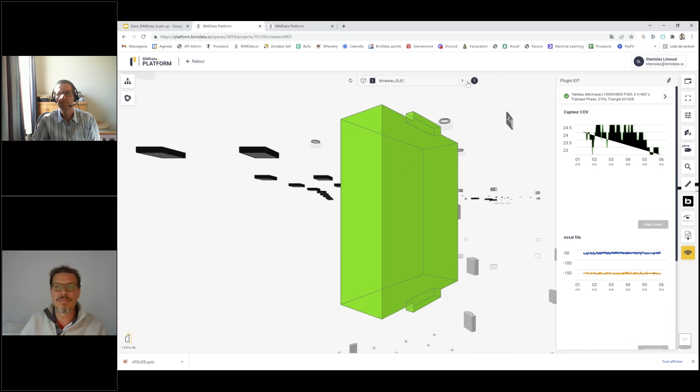So basically, I'm going to open the electrical model from the Socotec head office, and as you can see, we are fetching data from Schneider Electric. Again, there is no way I can interpret the data, Schneider is doing it. To give you a better view, I'm going to add the architectural model, and then you get the idea.

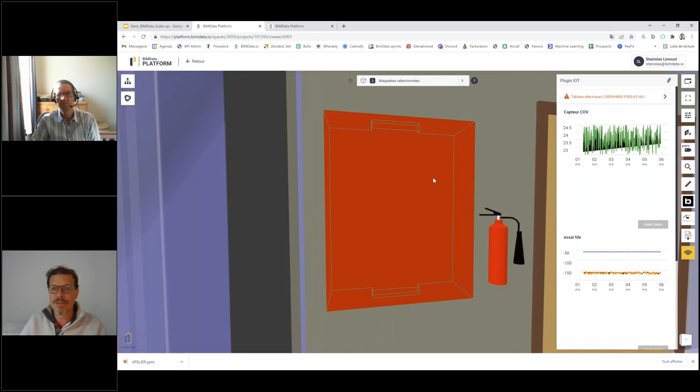For example, if I click on and I'm looking for an alarm, I've got an electrical board which is in red. So I just click on it and I've got the data, and I've got as well the 3D context. That's what you can see on the platform. It's not being used on the BIMData platform, it's being used on the client's own platform, so they can view the alarm and act on it. So basically, that's the idea.

The idea behind the technology again is to be able to do some connection with other data. It's not about one specific answer to a problem, it's more about how do I connect the right solution.

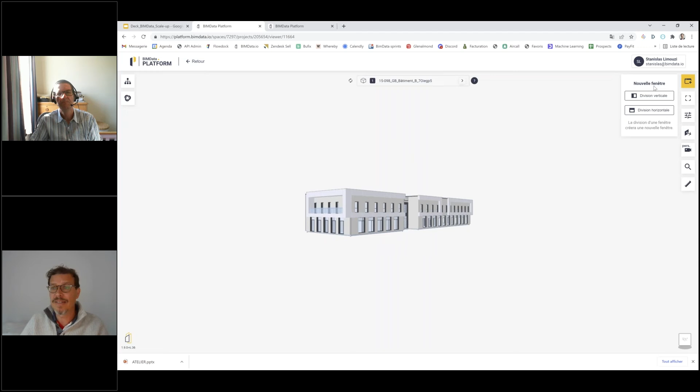And here I've got another example, basically, where the facility manager, again, is using our technology in their system, so they can integrate all the other services into the model.

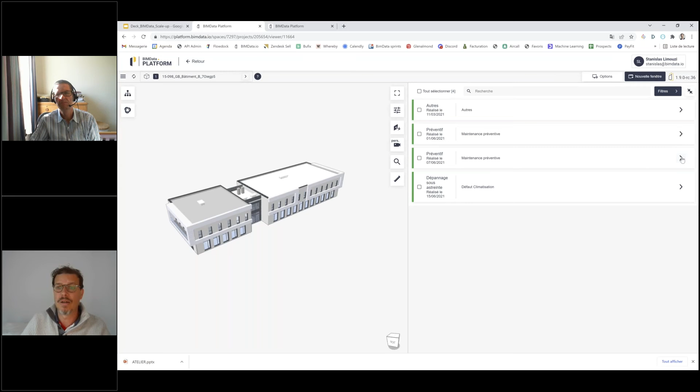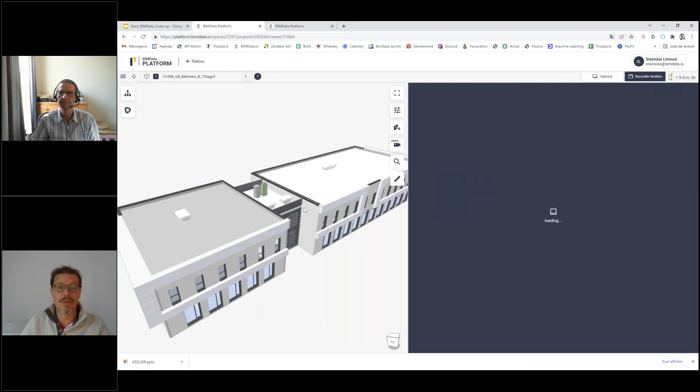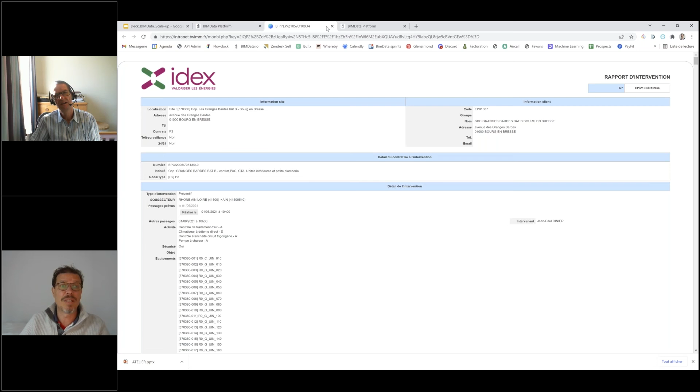So here, for example, I've got a filter where I can look for different periods of time, type of intervention, and such. If I click on one of those, I can do the link between the 3D model and the other services, and you can see the highlight here. I can do it the other way around too—I can click on an object and see what sort of intervention has been done on this specific equipment. And I've got two types. If I want to really see what's happening, I can make the link with the CMMS software, and basically I've got all the details of what they've been doing on the platform. So this is an example of the interface between the BIM structure and other types of data.

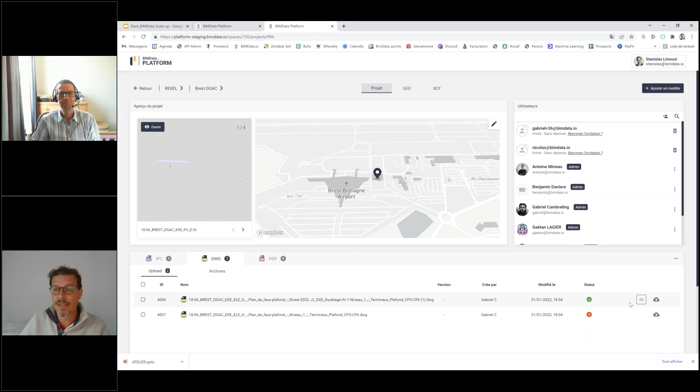We were talking as well about the way we connect different types of data. There's a very good way to work on buildings with all the data they have—of course using BIM, but also documents like DWG or PDF. I've got an example here where we have everything, but what we're trying to do is use the same sort of structure of a BIM model with data that has not been BIMmed, but the data is still worth a lot.

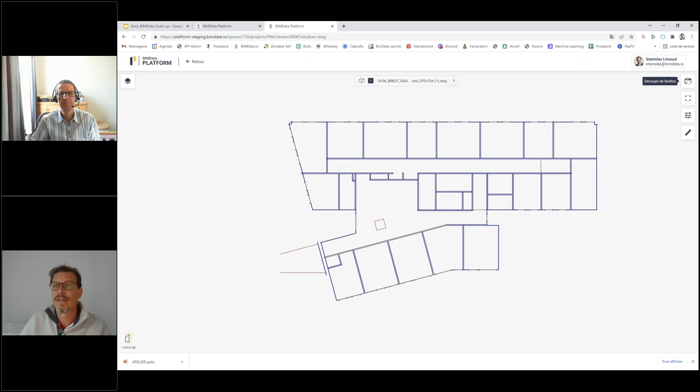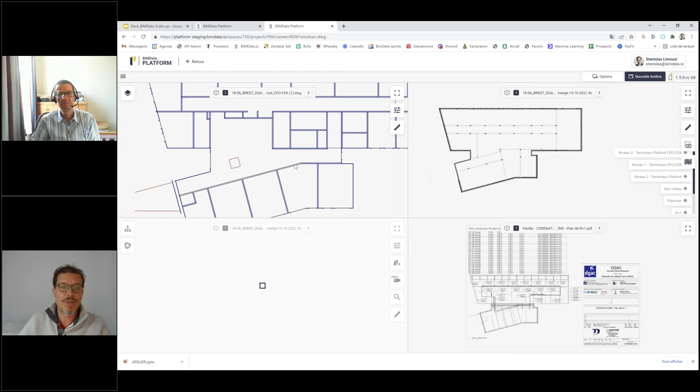So if I take, for example, here—let me check this. I'm going to open the 2D viewer, and then I'm going to open the PDF viewer, and again the 3D viewer here. So what we're doing is making connections between four types of data: the 3D model, the equivalent 2D IFC with the same sort of information, synchronized with the 3D—for example, if I move my building, I'll see this connection—and I'm also using the PDFs and the DWG.

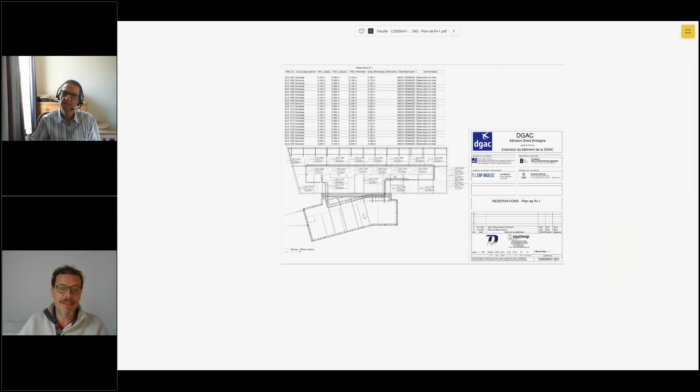Basically, one of the very important parts of BIMData is that we make this connection between different types of data. Every type of data is important, and legacy data has to be used because it's worth something. So we connect data, we connect people, and we connect systems. The legacy systems can be transformed very easily through the connection with BIMData.

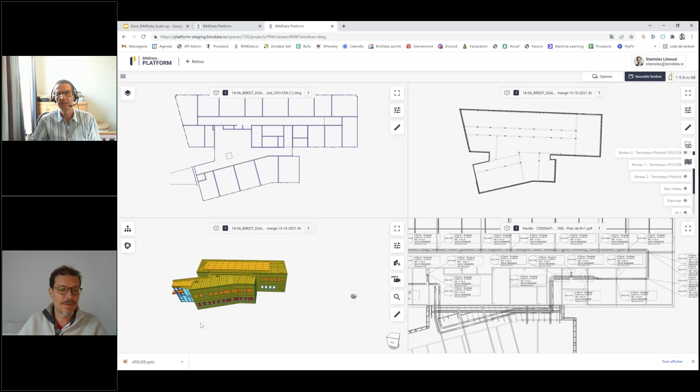It's certainly a very powerful demonstration that, as you say, we need to connect these different sets of data that come in different formats. What's particularly powerful for me is the sense that with many assets, we won't have a full BIM IFC model, so we have to work with that legacy data and still enable it to be connected to newer data sets—around maintenance, around sensors being fitted—even though we don't have that original IFC model. It's a very powerful story about interoperability with the data we have, rather than the data we would like.

Yeah, exactly. Basically, what we've seen in the last 7 years is that the promise of BIM is amazing, but it's expensive, and the market isn't moving fast enough. So the idea is to take every piece of legacy data, structure it, and make it useful. Then you can start working without BIM, and when you're ready, you can move to BIM. For some of our clients, they don't even want to use BIM—they're just happy to have their data gathered in the same environment and connected, even with their internal documents. That's already something powerful: having the connection between a plan and a document.

I think that's so important, with so many thousands of assets in every market already built that haven't been BIMmed. As you say, there may not be a business case to retrofit and create a BIM model. So particularly when we think about sustainability issues as well as building operation, we'll have to work with these assets, with 2D drawings, and with legacy data that still needs to be digitized and connected to these other data sets.